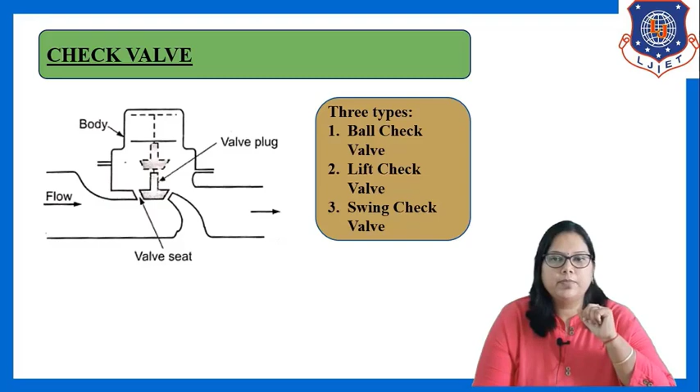While in the ball check valve, the shape of the valve plug is similar to the shape of a ball, and that's why we call it a ball check valve, right? And the swing check valve is similar to the lift check valve. So I can say that the check valve configuration differs in the valve plug shape only, and the remaining procedure of this valve is the same for all 3 types.

Fine. The figure which you see on the screen is of the lift check valve, right? Basically, a check valve permits flow only in one direction. This is a very important point. Any check valve permits flow only in one direction, and that's why it is also known as a non-return valve. Remember this: a check valve is also known as a non-return valve because it permits flow only in one direction. That means it does not allow the flow to reverse back.

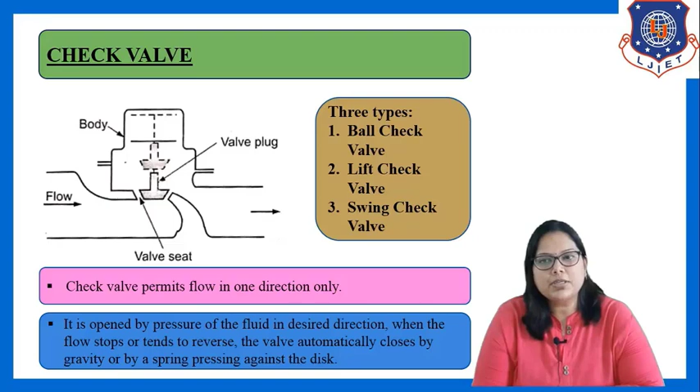Fine. So see in the figure, when the flow is coming in this direction, due to the pressure of the fluid, the valve plug position shifts in the upward direction. So it is opened by the pressure of the fluid in the desired direction. But when the flow stops or tends to reverse back, the valve automatically closes. Closes, that means the plug position shifts down. Understand? The valve automatically closes by gravity or by a spring pressing against the disc.

That means when the flow is coming in this direction, the valve plug position is upward, but when the flow stops or tries to reverse back, the valve closes by gravity or by the spring pressing against the disc. And that's why we can say that a check valve permits flow only in one direction, and that's why it is also known as a non-return valve. Clear? So this is the check valve.

In our chemical industry, whenever we require flow in only one direction and we don't want the flow to reverse back, we have to go for a check valve or non-return valve. Fine. So this is the construction and working of the check valve. So till now we have covered the main 4 types of valves: gate valve, globe valve, plug cock valves and check valves. These valves cover a wide range of applications in any chemical industry.

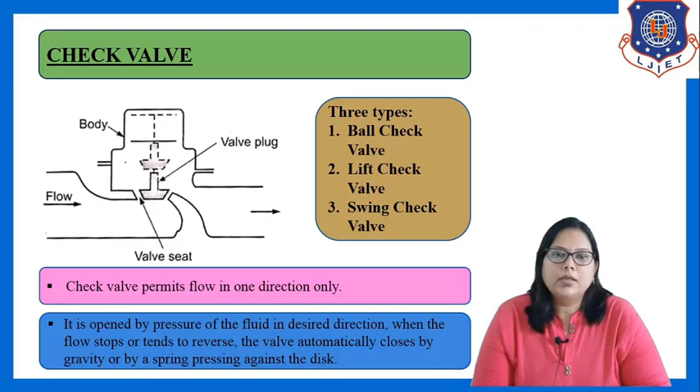Now let us go to another topic, which is prevention of leakage around moving parts. There are possibilities of leakage when we are using machinery having moving parts, and to prevent that leakage, we have to install some mechanism. In many processing equipment, it is necessary to have one part move in relation to another part without excessive leakage of fluid around the moving member. And for that, we have to use equipment for prevention of leakage around the moving part.

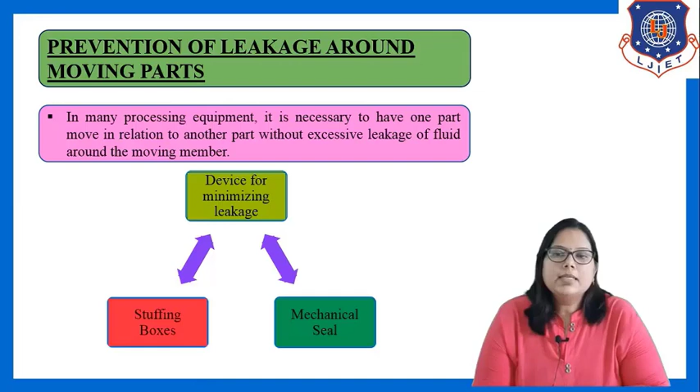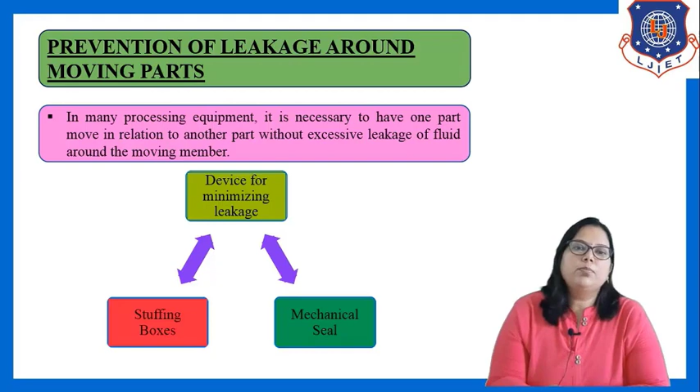So, let us classify the devices for minimizing the leakage. This is important where important chemicals are transferred from one place to another, because there are chances of leakage of those chemicals. So at that point, we have to install a device for minimizing the leakage. Now let us see which devices are used for minimizing this leakage. The first category is stuffing boxes and the second is mechanical seals. These are the two devices used for prevention of leakage. Now let us see both devices in detail.

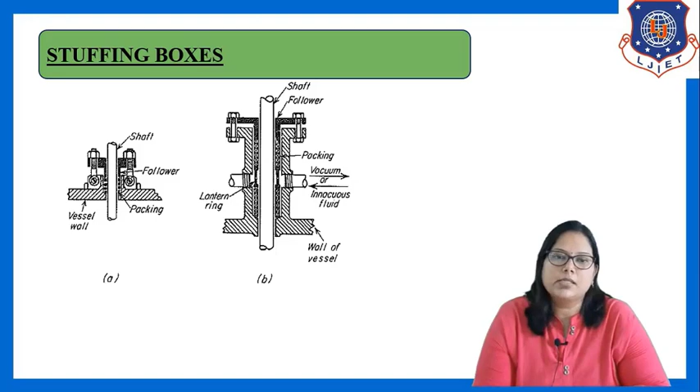Fine. Now, where there are leakage chances of the chemical, at that point we are attaching this stuffing box with this shaft position. See in the figure, this stuffing box can provide a seal around a rotating shaft and also around a shaft that moves axially. So the equipment where there is a chance of leakage, that shaft or that point is connected with the shaft of this stuffing box.

In this stuffing box, the packing plays an important role in preventing leakage. I am repeating again, this is a very important factor. Packing plays an important role in preventing leakage through the moving parts. So what will happen when we are combining the two shafts of the equipment or of the stuffing box? What will happen when there is a leakage in the equipment? That leakage is prevented by this packing portion of our stuffing box.

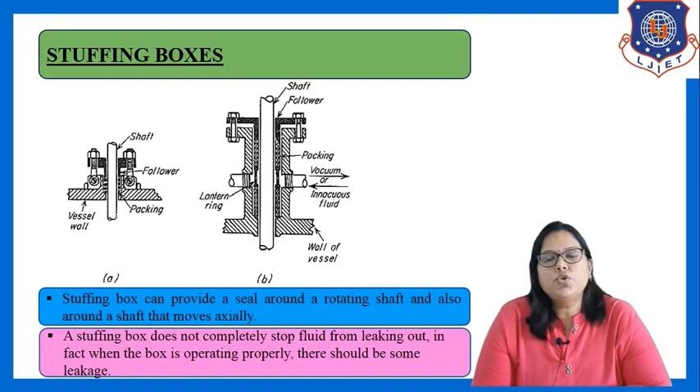But this stuffing box does not completely stop fluid from leaking out. It is not 100% efficient. In fact, when the box is operating properly, at that time also there should be some leakage. Right. It will prevent the leakage from the moving part, but not 100% stop the leakage. So this way we can prevent the leakage by using these two forms of the stuffing boxes. Now the second device which is used for prevention of leakage through the moving part is the mechanical seal.

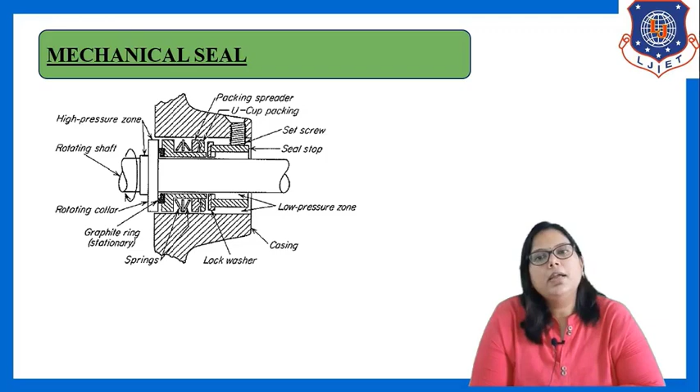You can see in the mechanical seal, the important part, or I can say the heart of the mechanical seal, is the U-cup packing, which you can see in the figure. It consists of U-cup packing, packing spreader, graphite ring, the rotating collar on the rotating shaft, and all these parts are assembled in a casing that you can easily see in the figure. Fine. But the main part, or heart of the mechanical seal, is the U-cup packing, as the leakage is prevented by this U-cup packing.

In this mechanical seal, the sliding contact is between a ring of graphite and a polished metal face, usually of carbon steel. You can see in the figure the ring of graphite, which is stationary as mentioned in the figure. That sliding contact is between this ring of graphite and the polished metal face, which is usually of carbon steel. Again here, similar to the stuffing box, the rotating shaft of this mechanical seal is attached to the main shaft of the equipment where there is a chance of leakage.

Then, if there is a leakage of the fluid, that leakage is prevented with the help of this U-cup packing and the graphite ring. And in between there is a packing spreader which helps the U-cup packing prevent the leakage. This stationary U-cup packing, usually of rubber, is set in the space between the body of the seal and the chamber, which is seen in the figure. Right, that U-cup packing is set in the space between the body of the seal and the chamber, and that keeps the fluid from leaking past the non-rotating part of the seal.